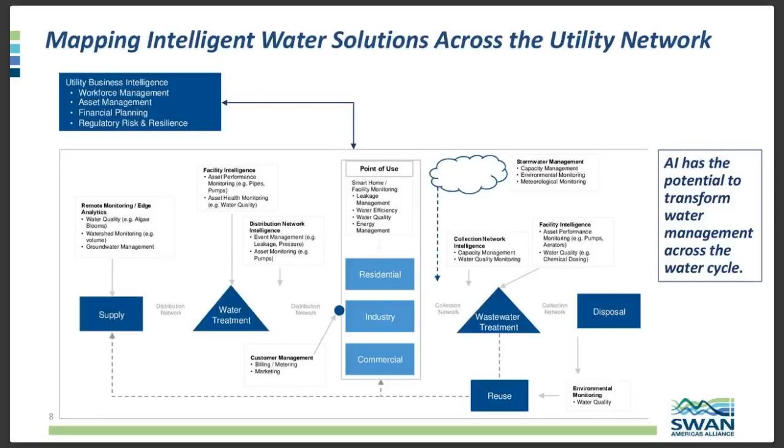But we want to highlight just a couple examples that we think are really illustrative of the potential impact that AI and machine learning can have, particularly around affordability and resilience within the water industry. The first example that I want to highlight is wastewater and stormwater collection networks, and more specifically sewer overflows. Obviously, these are a really significant issue, a really significant challenge from a resilience or an environmental health standpoint.

Particularly for those communities that are under large state or federal consent decrees, they're a very significant challenge from an affordability standpoint as well. Bluefield Research has tracked over 90 federal consent decrees, not counting state level consent decrees, but 91 federal consent decrees between 1998 and 2018. Total estimated compliance cost of about $52 billion.

And individual consent decree programs can run as much as $3, $4, even $5 billion, which obviously imposes a really significant financial burden on utilities and on their ratepayers. What we found, though, is that utilities that have worked with solution providers to implement artificial intelligence and machine learning have been able to meet their overflow reduction requirements for as much as 5 to 10% of the cost of traditional large-scale infrastructure programs. And they do this in several ways.

One of the key dimensions is gathering robust data from throughout the pipe network, from throughout the collection system, on flow and on level, combining that with real-time weather data or meteorological data, to really enable a machine learning system to learn how that specific sewer system will behave under specific conditions, whether that be in a wet weather event or other types of conditions, and essentially optimize the existing storage capacity of that pipe network, rather than needing to build expensive new storage tanks, for example.

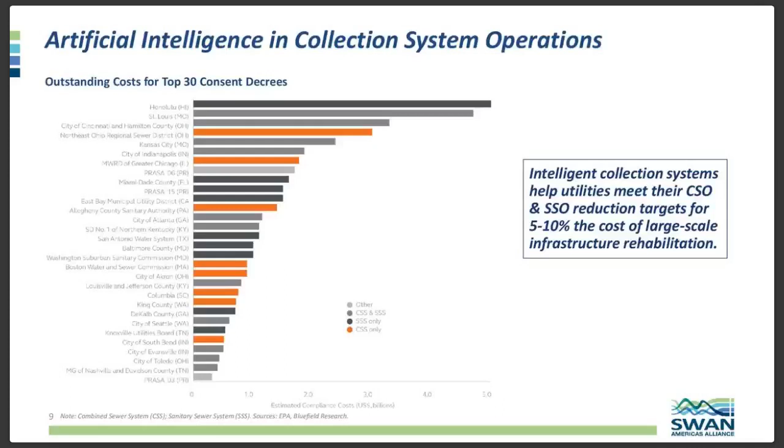Actually optimize and make the best use of the existing capacity by either automatically opening and closing gates and valves, or making recommendations to system operators to make sure that they're really operating that system in the most efficient way, making use of all the existing capacity and reducing overflows. Another really great example is in treatment plant operations, and you're going to hear a good deal more about this later in the webinar, so I won't touch on it for too long.

But essentially, looking historically at Congressional Budget Office data for water industry capital versus operating expenditures, we see that over the past few decades, OpEx has really skyrocketed relative to CapEx. About $80 billion per year for the past few years of water utility operating expenditure.

There are a number of different ways that artificial intelligence and machine learning can be applied to help utilities reduce and optimize their operating expenditures, whether that's at the treatment plant level, monitoring and predicting water quality of incoming water to enable more precise and pinpointed application of chemical dosing, for example, or monitoring and eventually learning and being able to predict and forecast demand, comparing that against spot price of electricity and fluctuations in energy prices to optimize pumping.

And then finally, monitoring asset health, monitoring asset performance to ensure that when an asset starts to deteriorate, when it starts to operate less efficiently or at a lower capacity than designed, the algorithms within the machine learning system are able to recommend maintenance interventions to make sure that those issues can be addressed before they result in a large-scale failure of that asset.

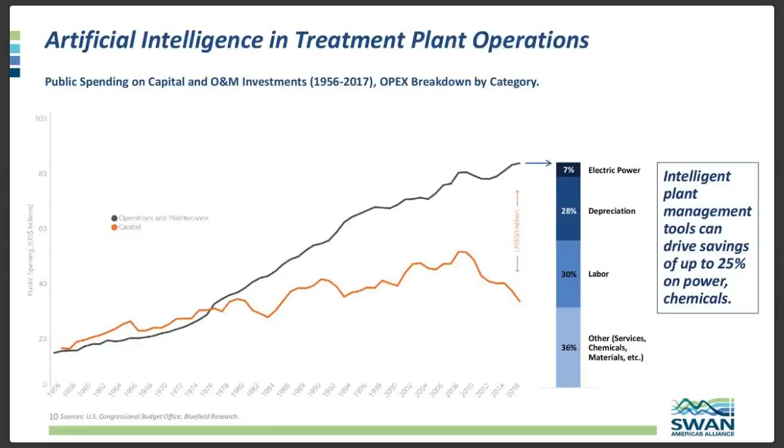And then finally, one application that maybe we don't think about quite as often, but I think it's also really illustrative of the breadth of what artificial intelligence and machine learning can do for the water industry and for water industry customers, is within the level of individual homes. So this is some information from the Insurance Information Institute suggesting that within the U.S., water damage and freezing are the single largest contributor to homeowners insurance losses.

So on average, about 30 to 31% of total homeowners insurance losses are attributed to water damage and to leakage. And individual claims typically run around $10,000 per household. And the average U.S. household loses about 10,000 gallons per year of water through undetected leaks. What we're seeing is a number of vendors coming out with solutions, piggybacking off of the broader smart home movement with Amazon Alexa, and with Nest thermostats and Ring doorbells.

Essentially, smart home leak detection devices that can monitor and eventually start to learn the common behavior, the common water consumption trends of individual households, and then detect when patterns start to deviate from those trends. So whether that's a small scale leak that's developed or a large scale pipe break, these systems can automatically turn off water supply to the house to prevent any further damage, and notify the household that something has gone wrong.

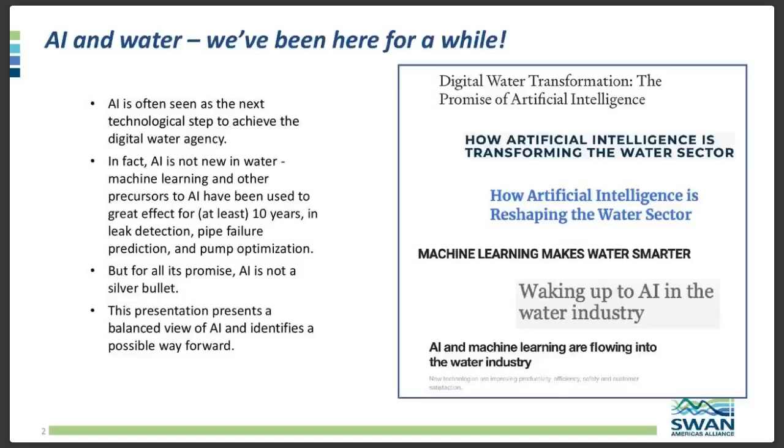So what I thought it would be useful to do would be to try to present somewhat of a devil's advocate view of AI. I'm an absolute believer in AI, but I'm going to spend the next few slides trying to persuade you that I'm not, because I think that's a useful thing to do.

The first point I'd make from a devil's advocate perspective: the technology is evolving so fast that the industry is actually unstable right now. Even by the standards of the last 25 years, the rate of progress in AI, as measured by things like the number of patents and the growth in new styles of AI, new techniques, new tools, and so forth, is absolutely astounding. What that actually means is that competitive advantage for any given vendor that's majoring in AI is probably going to last for about 20 minutes.

That's good in a sense. The prices will come down, and if you're the sort of kid in a candy store mentality, there's going to be plenty of new options for people to try. It's also bad because your utility's AI strategy may not weather well, may not look good with age. And one of your strategically chosen AI vendors may have disappeared or been taken over just when you need them.

What it also means is that if you're a vendor in this space, you need something a lot more than just AI alone as your secret sauce, or you're not going to be there for very long. And it also means that utilities who are buying AI need a better idea than just buying AI for its own sake. As the previous presentation made very clear, you need to have some clear purpose in mind, and you need to understand that AI is in fact an improvement over what can be done today.

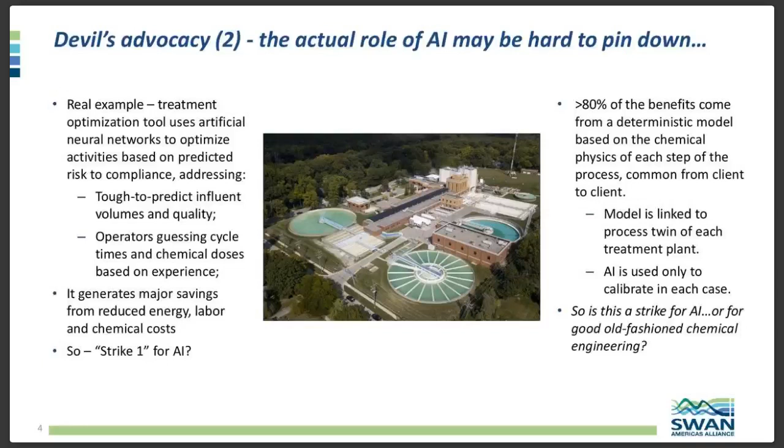They then just use a neural network to calibrate the model to the particular water treatment plant that's actually using it. So I leave the open question with you. Is that actually a strike for AI, or is it for good old-fashioned chemical engineering? It's certainly worthy of thought, because it does raise the issue of, well, how far can I get before I actually resort to AI? Especially as, from a devil's advocacy point of view, AI may actually be just a better mousetrap.

We hear a lot about artificial intelligence in leak detection. Well, you can detect a great many leaks with current techniques that don't necessarily use AI. And actually, at a certain point, economics applies. Once you've detected the leak, you've still got to dig up the street and you've got to fix the leak. That's expensive. AI is not going to fix that part of the problem. Therefore, the benefit upside for AI in leak detection may not be as great as you might think.

Similarly, if you are using AI to optimize water quality, once you can consistently and reliably meet statutory requirements for water quality levels, how much actual further upside is there in artificial intelligence? This is a question you may well want to ask. If you're only meeting those requirements very inefficiently, there may well be some upside, but equally the upside may not be as much as you might think.

Equally, you may find that the benefits that you're thinking to apply from AI have been preempted by an earlier tool. And as an example, from my own days in IBM, IBM was using Maximo back in 2010 to predict which pipes are at risk of breaking next year. And also, incidentally, to predict which roads are at risk of breaking up next year as well. And they were using statistical clustering and machine learning, which you would think of as precursors or early forms of AI. And they were using it very effectively, 18% reduction in cost at the same level of reliability.

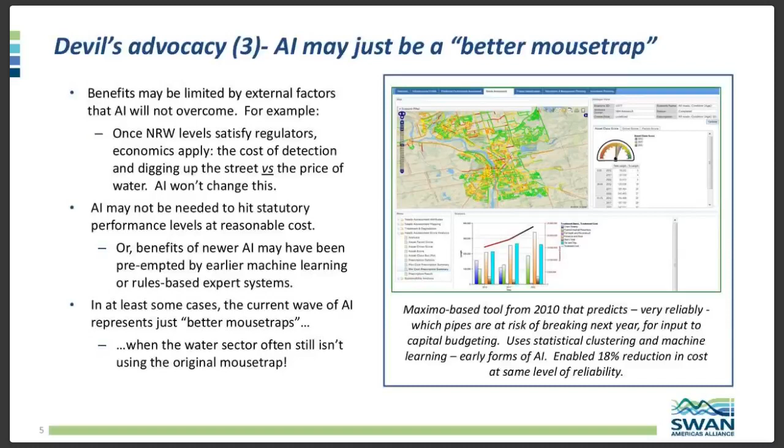What is any new application of AI going to add over and above this level of performance, which is available already? So there just needs to be some thought of, hey, wait a minute, are we just buying a better mousetrap? Especially when the water sector doesn't have a great record of using the mousetraps that are already there. The speed of technology adoption in the water sector is notoriously slow.

Another point to make about AI is to be very clear what you're buying, because the value of AI may not actually be in the AI part. The value of AI may be actually enforcing the integration of data between different functional silos. And we certainly see this in some of the central event management products that are out there from the likes of Takadu and Trimble and such.

They do use AI, but actually, if you really look at it, their real value lies in creating the proverbial one version of the truth that all of the different functional silos, the operators, the maintainers, the planners, the financiers and so on inside a water utility can buy into. The real value lies in enabling them to collaborate without necessarily having to surrender control of their own data to some other functional silo. So what you're getting with AI may not be what you think you're getting. It may be valuable, but it may not actually be the AI that's delivering the result that you really need.

A further and final example of devil's advocacy for AI is the fact that it is, in many cases, somewhat of a black box technique. It's certainly absolutely dependent on data selection and data quality, as we just heard about growing concerns about bias and so on. With AI, it's garbage in, garbage out, as it always was with computing, but absolutely on steroids.

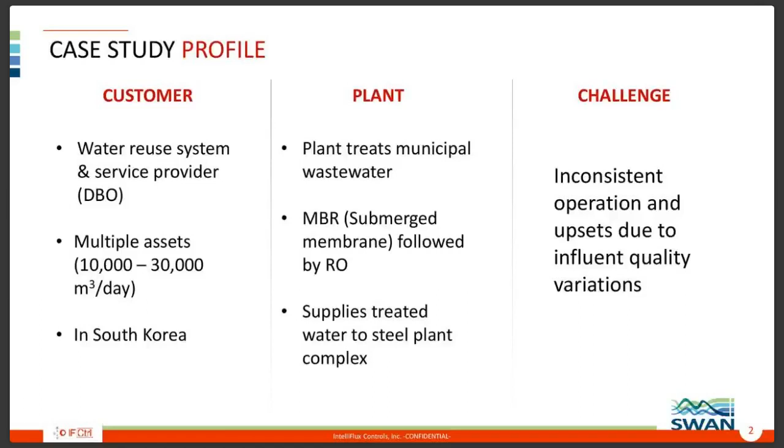The challenge that this plant faced is inconsistent operation and upsets caused by influent quality variations. In summary, when we discussed with the customer and various stakeholders within the customer's company, the overall message was influent quality variations are causing margin erosion in that project over the lifetime of the plant, and it's getting progressively worse as the plant is aging. And when we talked to different stakeholders, they turned up multiple OPEX consequences, which were described differently by various stakeholders, like lower production, lower yield, more waste, increased plant downtime, increased labor and maintenance, frequent cleaning requiring a lot of operator intervention, higher energy consumption, reduced component life, and frequent component replacement.

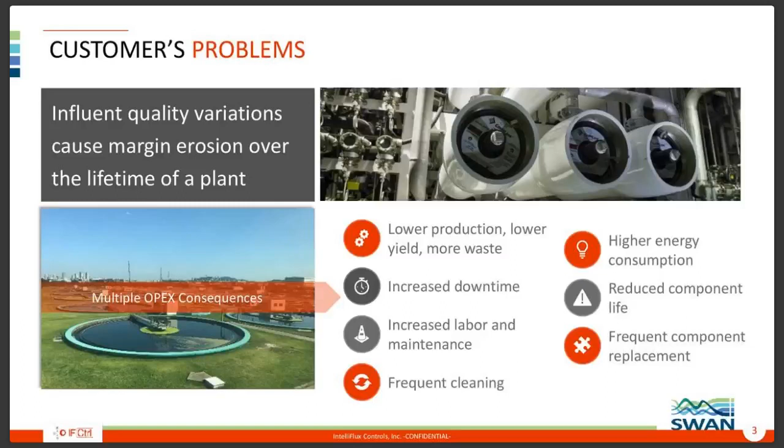Now, of course, we did homework with the customer to figure out what else they tried during the previous 5 years of the operation of this plant. And it ranged from trying to figure out what capacity enhancement to meet the shortfall or any kind of derating would require.

The essential message was it would be CapEx intensive, and doing it midway through a project is sometimes not a very good business decision. They, of course, resorted to aggressive maintenance, which requires adopting fail-safe maintenance models and continuous plant monitoring. Basically, plant monitoring was intensified. However, no automation was implemented to meet up with that. Of course, involving more labor and implementing these incurs higher OPEX.

The third part, which is very common in the water treatment business, is the existing technology is not suitable, and so we have to install new technology. This company wanted to install something for their intake water, but that proved to be too CapEx intensive. There were various bootstraps used to manage the total cost of water, such as managing the vendor chain more aggressively. They led to inconsistent outcomes and stressful supply chain relationships.

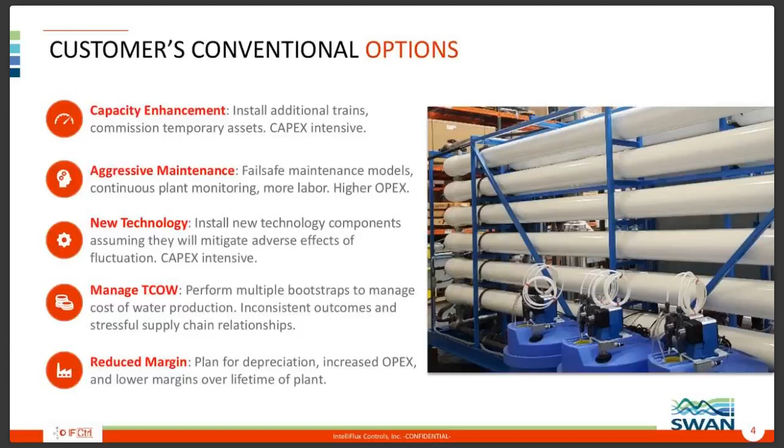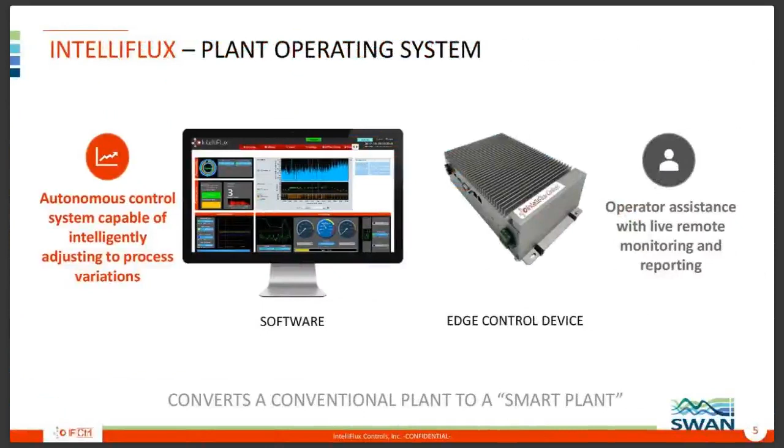And finally, what the company was basically resigned to was planning for depreciation, margin reduction, and increasing OPEX over the lifetime of the plant. This is the point when in 2017 we did a pilot on a small plant with the company, and they adopted it in their stage gating process to the next gate of putting it on one of their working 10,000 cubic meters per day production plants. We primarily managed the membrane filtration MBR systems and ultrafiltration unit, but I'll come to those details shortly. But let me discuss what we proposed to them.

So we proposed to them our solution IntelliFlux, which was positioned as software which acts as a plant operating system, customizable for their plant. It is a combination of software and an edge control device, which we place in the control room of the plant. It would provide autonomous control capable of intelligently adjusting to process variations, and an element of operator assistance and decision support with live monitoring and reporting. The essential sales pitch for us was that it will convert the conventionally operated plant to a smart plant.

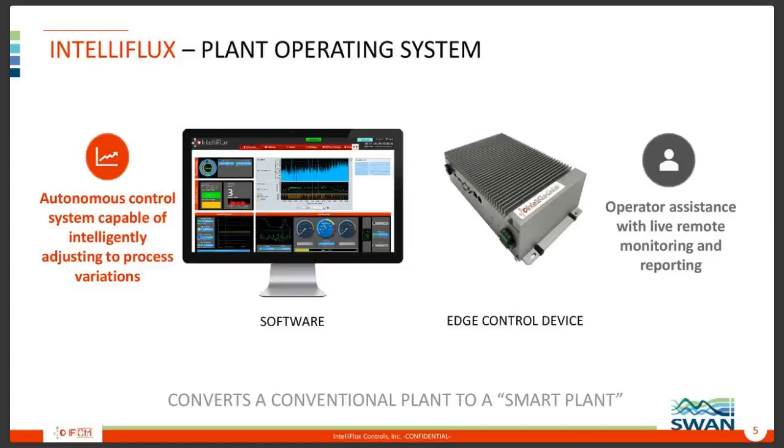The key features of IntelliFlux that we presented to the customer, and that were attractive to them, was it takes the philosophy of an operator who comes to the plant and is given an SOP, or standard operating procedure, to start operating the plant. As that operator learns and gains experience about the plant, that operator is able to deal with various predictive aspects of how to manage downtime, how to manage the data and various other aspects.

So the features in IntelliFlux included an element of machine learning based optimization. We provided the automation part, which means we were managing the set points and responding to upsets in real time. So we implemented real-time decision automation. The installation had to be plant hardware agnostic and a retrofit solution, which implied that we won't be adding any sensors or additional hardware. The premise was an operator gets to the plant and gets the plant as it is to operate. So IntelliFlux has to do that.

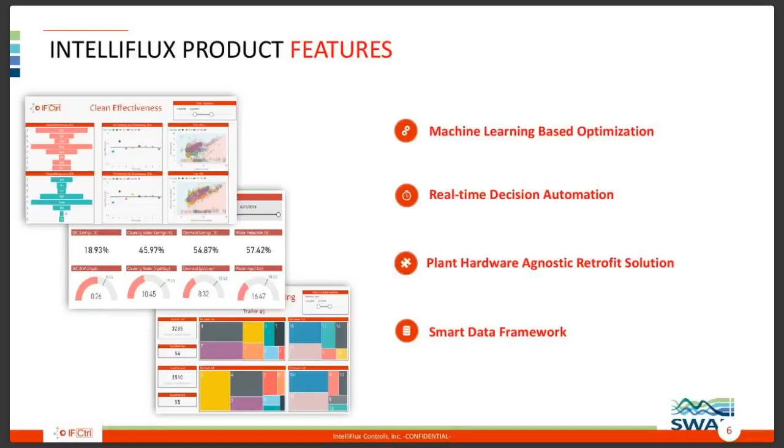And finally, we of course had to crunch numbers and get temporal resolution of data. So we used a very interesting client-server based smart data framework where we relegated different types of tasks based on their time value, or their immediacy quotients. How we delivered these results, I'll be very brief, but this is perhaps a little pedagogical. What IntelliFlux incorporates is a ground-up implementation of the Industry 4.0 digitalization stack in a unique client-server package that enables overnight transformation of an existing process plant to a smart plant.

How we do it, there are 4 pillars of that delivery process. We focus on the process automation. Here we use system engineering and adaptive process control tools and paradigms that have been used for 50 years in plant management. Conventionally, this should ideally be a subset of what you call digital twin technology. We needed autonomous decision-making and optimization features, so those features were embedded in the software. This embeds some element of very deterministic process modeling, as well as some elements of machine learning and artificial intelligence.

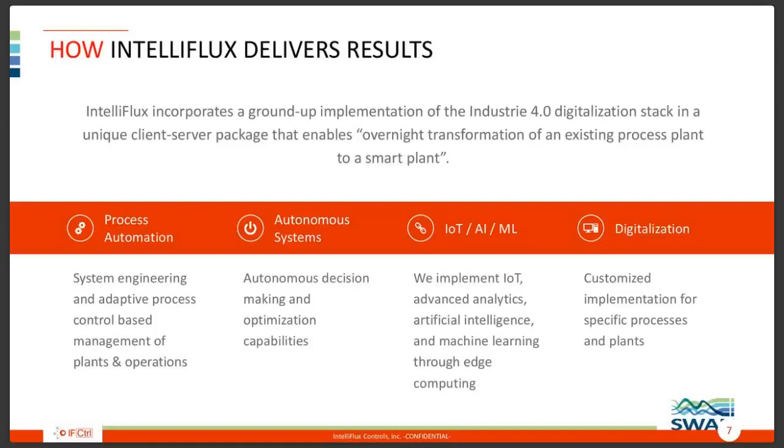The third part was we implement IoT, advanced analytics and artificial intelligence and machine learning tools through the edge computing device, which allows us to be a little more timely, so the system responds in near real time to any influent quality fluctuations. And finally, we provide a unified platform for customized implementation of a digitalization framework for the specific processes and plants, so that every stakeholder sees the same truth. I hope you heard about all these elements in the previous presentation.

To just quickly go over the Industry 4.0 design principles that are embedded in the product, we embed the 4 pillars of interoperability of different components of the plant's technologies, as well as the human element that is present there, through a combination of data sharing, sensors, actuators that are correlated using a single interface. So we have a much broader optimization phase space.

We use the transparency for the plant operators and engineers by providing the mapping of how the process is operating by comparing it constantly against the digital copy of the physical system or the plant. So we are mapping the progress of the plant's operation against its digital twin. The third element is decision support, which everybody understands from the products that is provided. We provide dashboards, correlations, analysis, some predictive, some historical, that allows the operators and stakeholders better visualization of how the plant is operating.

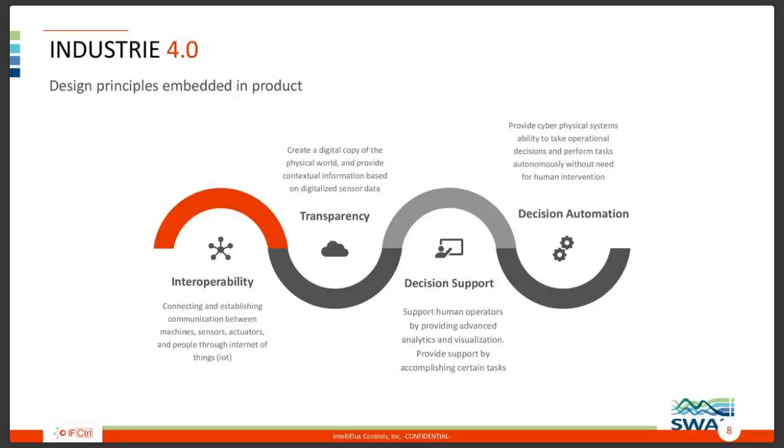And the final step where we think we are a little differentiated is we take the liability of automating some of the processes. The liability's extent is very small in our mind. We know the phase space in which the operator gets to change set points, and we use that phase space to change the set points, and it allows us to respond to any condition without the operator being constantly present in that system to monitor the system.

So to get back into our case study, here is a snapshot of how the installation was done. The plant is shown on the left panel photograph. The middle panel shows the control panel, and tucked at the bottom on the floor, right side of that control panel, is a small box, which is enlarged on the right-hand side photograph, which is basically our edge control device. It is simply connected to the PLC and the SCADA network, and it basically collects data and sends instructions to the PLC. The software configuration, the patch coding of the PLC, and all of it can be customized for the plant once you know the process information in about 2 weeks.

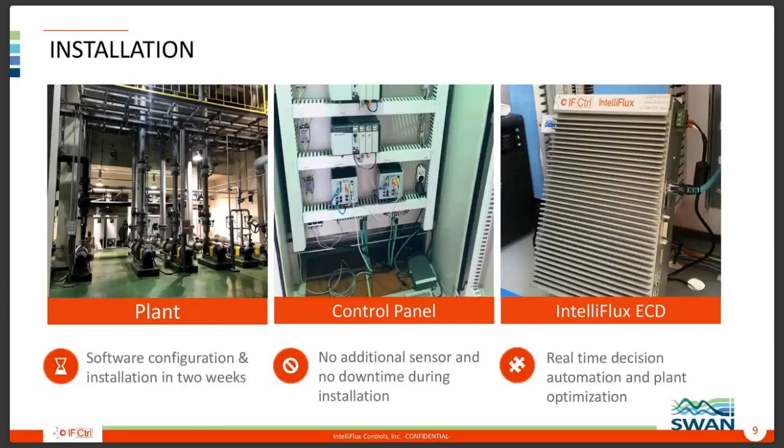There was no additional sensor and there was no downtime other than to reboot the PLC when you put the new program, and it could be tucked in during a natural downtime or a shutdown for maintenance. And the ECD, once you install it, starts immediately learning, gathering data, correlating the data and providing the plant optimization framework, which it learns within the next 7 to 14 to 28 days, depending on the frequency of observations of certain kind.

Jumping to the outcomes of this study, since this plant has been operating for more than a year and a quarter, we have been monitoring it very closely. More than us, the customer has been monitoring the progress, and we aggregate the results daily, weekly, monthly, quarterly, and yearly. And during the last year, these were the average results they got out of the membrane filtration plant with IntelliFlux compared to the baseline operation, which was based on the previous 3 years of operation of the plant.

So for energy, we reduced the energy consumption of the plant by about 34% on average. The disposal volume was reduced by 30%, which was a cost center. The production on average from the membrane filtration system was increased by 3%, which is quite a bit for a 10,000 cubic meter per day plant, 300 cubic meters per day. And the membrane life was a very interesting observation. It formed a part of the depreciation, and we arrested the rate of that depreciation during the last year. So their projected membrane life is now increased by about 20%.

So to summarize, this system has been operational since June 2018. On top of the above metrics or KPIs, we provided regular operator alarms for any kind of anomaly, like a pump shutdown or a tank not being filled up to the proper extent, or a lowering of a dose of a chemical because the chemical's original dose or concentration was not correct, to managing the system through upsets. We auto-generated reports for the operators, and the operators and everyone in the management loves us for giving them reports by rote, which did not happen earlier on such a regular basis.

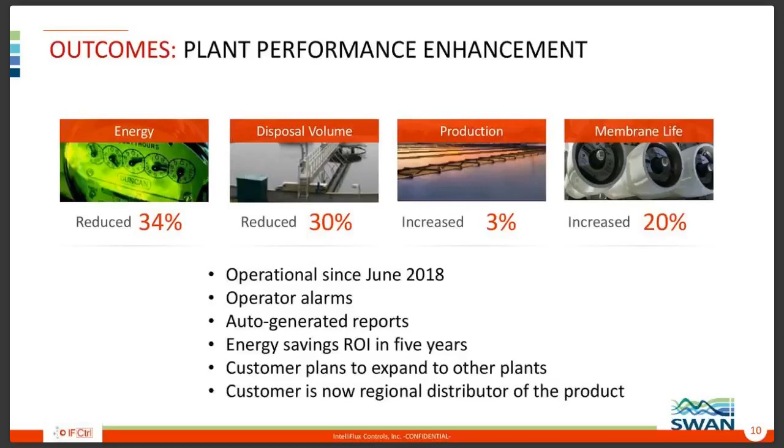And they calculated the energy savings of the plant and projected that the ROI for the product would be in about 5 years of time, which was news to us, but it was interesting to know that it fit the customer profile based on that. It was only based on energy. The customer, of course, plans to expand it to their other plants, and they have actually become our regional distributor of the product in that market.

Here is a customer testimonial in the slide on the right-hand side, but I would like to focus first on what led to that testimonial after about a month and a half. So I tracked two values of daily averages on the two graphs in the left panel. The top is a disposal volume, and the bottom is the UF recovery, which shows the yield of the plant.

And in the black bars, you are seeing what happened before June 25th when we installed and turned on IntelliFlux, and what was happening since then in the red on the right-hand side. And you could see very clearly that there was a distinct difference in the patterns that evolved daily in terms of reduction in disposal volume and increase in UF recovery.

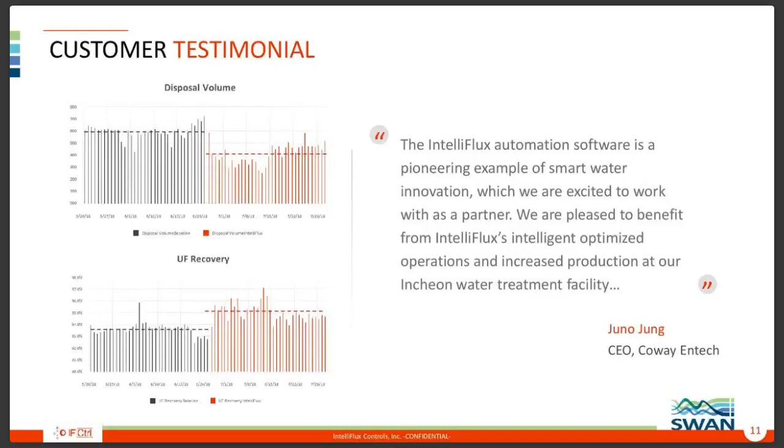And this sold the product to the customer, because in any of these applications with a service model, our biggest challenge is that we have to remain stuck to the customer and be of use to them. So with that, I hope I have given you a case study that shows that for all of the concepts that were discussed in the earlier two presentations, we have a minimum viable implementation of that stack that we are trying our best to productize and provide our customers at a good price point.